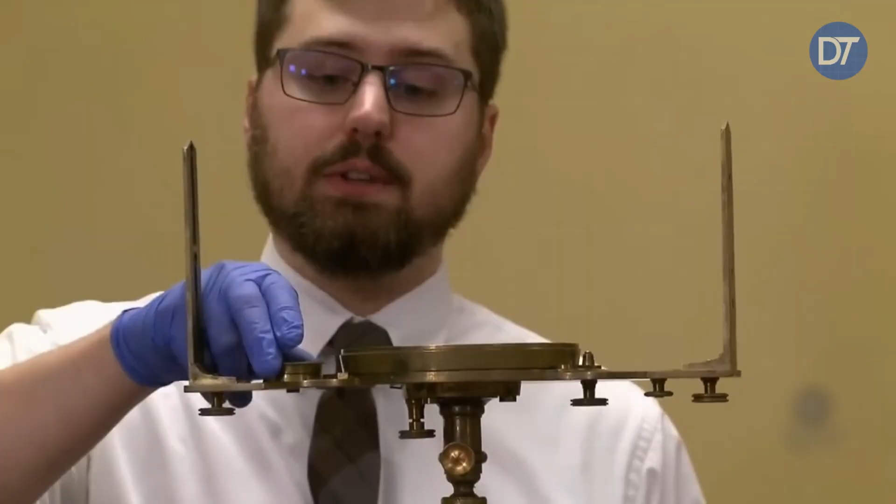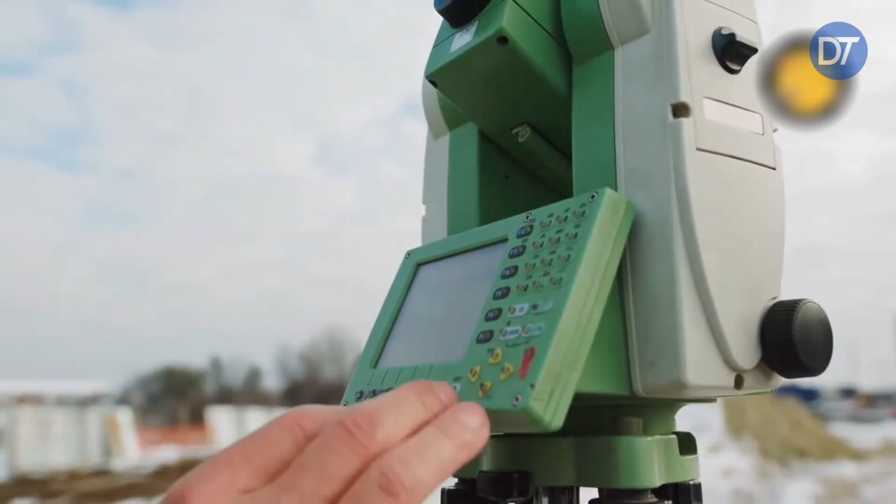There was no beam of light to send across the water and time on its return, and no signal from overhead to read a position off the sky, because neither had been invented and neither would for another 30 years. Between him and that far cliff ran a strait that no tape could cross, and somewhere out in that water, at a spot nobody had yet marked, a tower would have to stand.

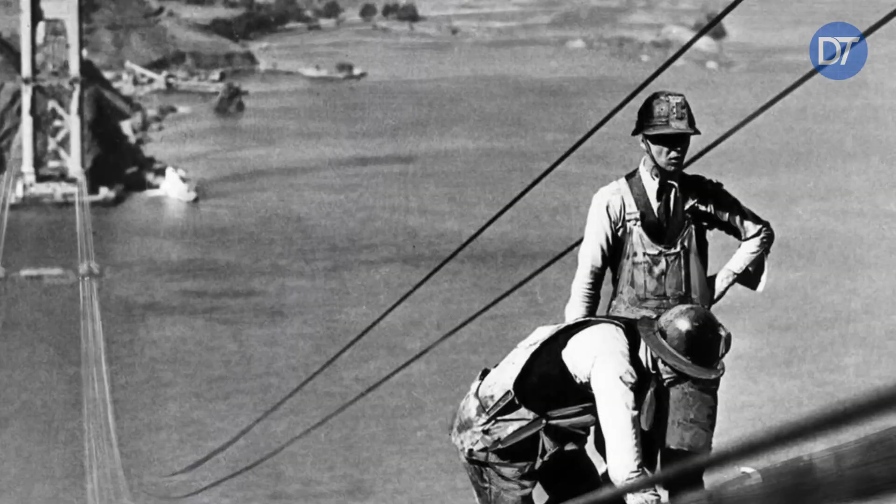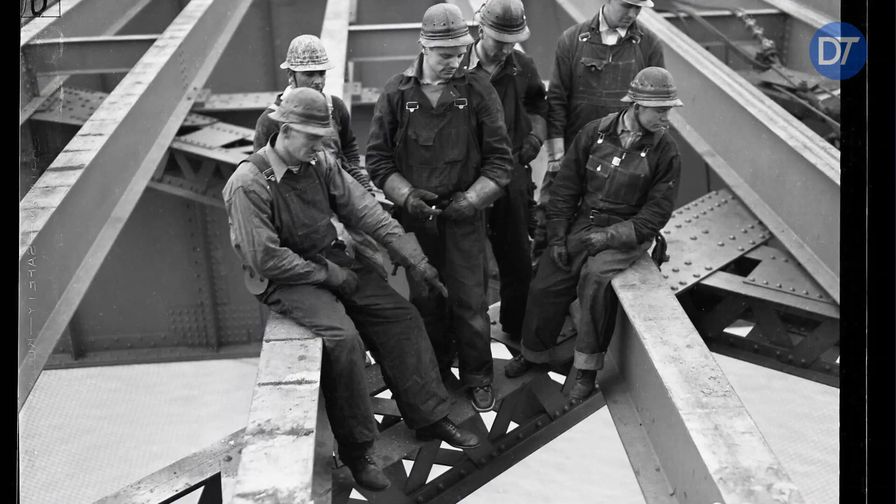What that man was fixing was the position of one of two towers that would carry a bridge across the Golden Gate, and the difficulty was that he had to be exact, while almost nothing about the site would hold still. He had to fix two tower positions nearly a mile apart, one of them more than 1,100 feet out

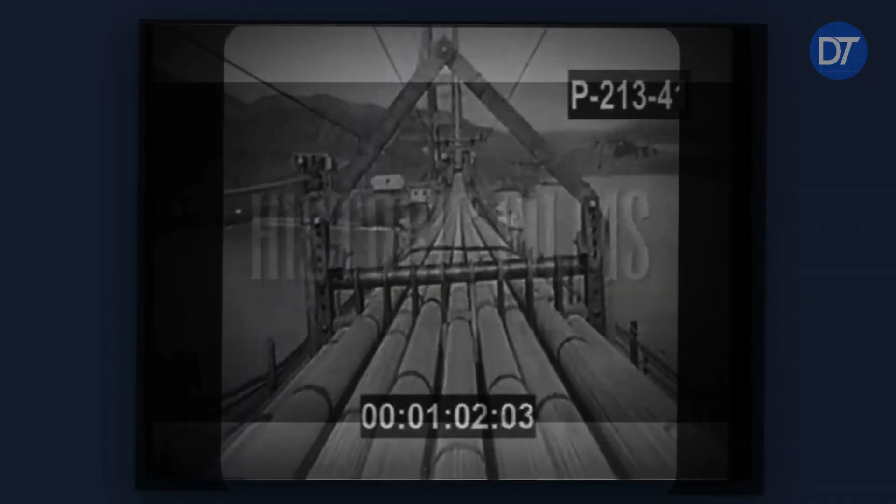in open water, while the current beneath it ran to several miles an hour, while the shipping channel stayed open to traffic, while fog closed his sightlines for days, and while the whole arrangement stayed exact enough that two towers built years apart would end up carrying cables that met, wire for wire, in the middle of the span.

The bridge is usually remembered as a triumph of steel and orange paint. It was first a triumph of measurement. The steel could not be ordered, the cables could not be spun, and the towers could not be placed until someone had reduced a mile of moving water to a set of numbers and been right.

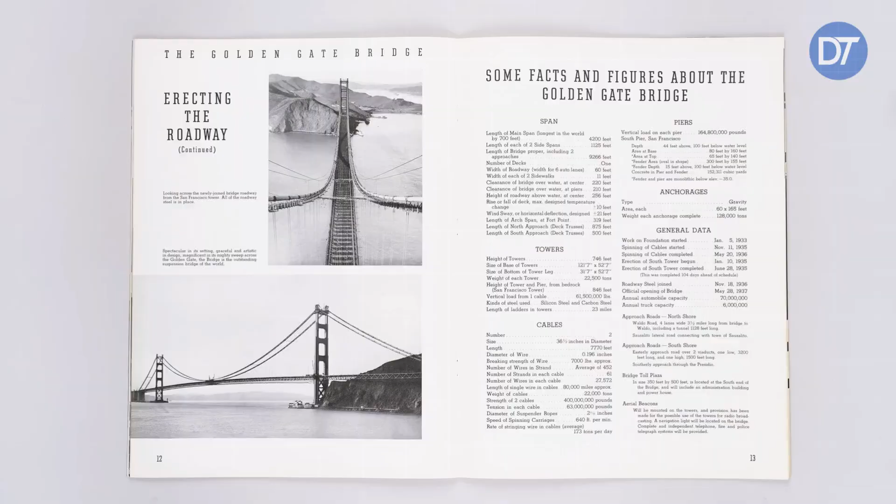This is the story of how a strait was measured with brass and steel tape. It is the story of the men who fixed two towers in the right place years before the cables that joined them existed. It is the story of one number, 4,200 feet, that had to be true before anything could test it. And the first obstacle was the oldest one in surveying. You cannot measure a distance you cannot cross.

The obvious answer was a steel tape or a chain laid straight across, the most trusted tool a surveyor owned, accurate on solid ground to a fraction of an inch. It was useless here. A tape stretched across a mile of tidal water would bow in the current, sag under its own weight, and never lie straight, and the channel beneath it could not be closed for the attempt.

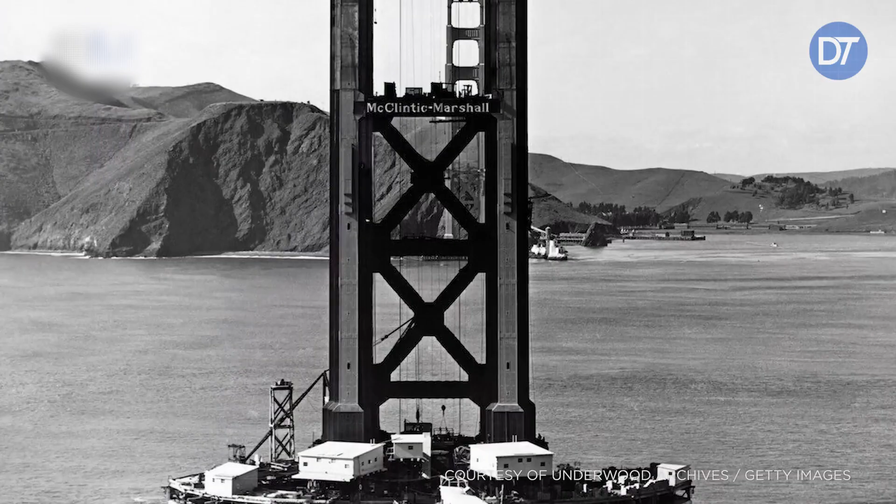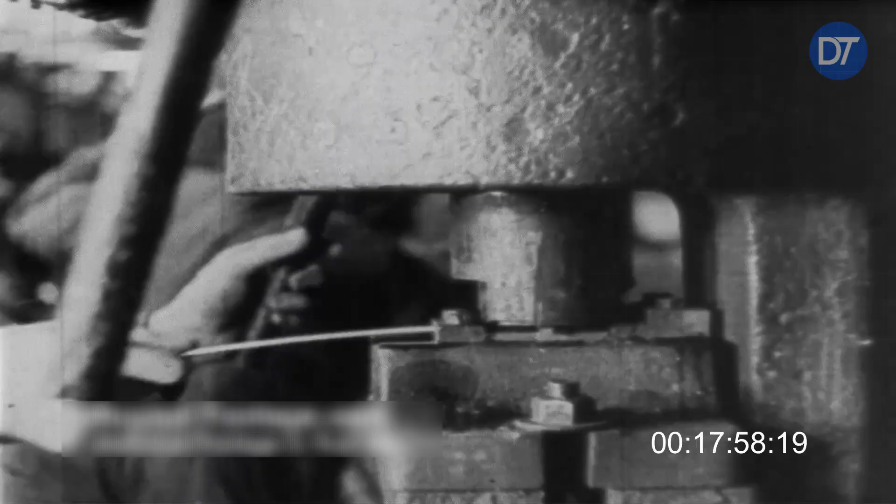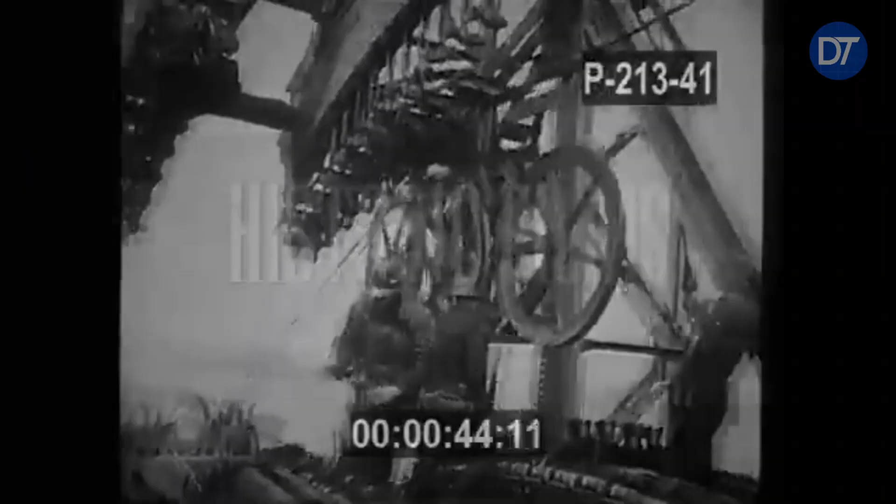The second answer was to take the tower positions off the nautical charts that already existed for the strait. Those charts were good. They were drawn to keep ships off the rocks, and for that they were precise to within yards. But a tower foundation had to be set to the foot, and its cable had to arrive at a partner tower a mile away and meet it exactly. So an error a passing ship would never feel would put the two halves of a bridge permanently out of line.

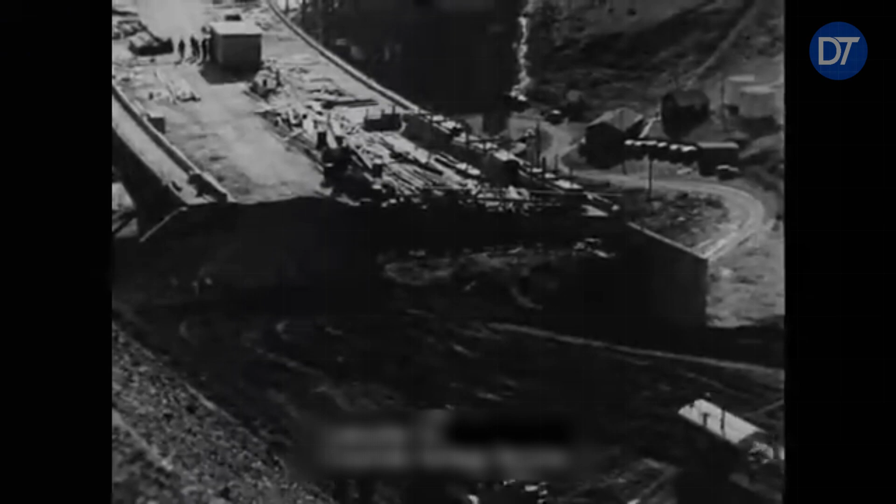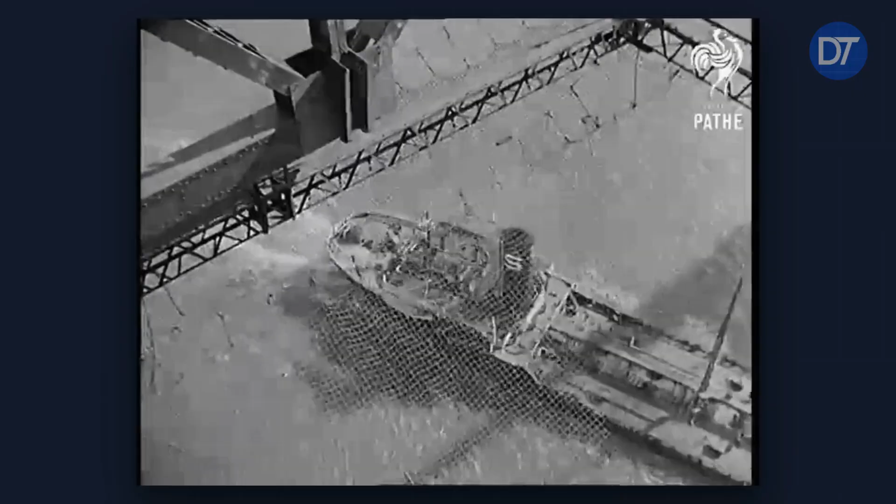The third answer was to measure from the water, from boats dropping marked buoys and ranging between them. At that time, it was hopeless. A boat has no fixed place to measure from, and the instant you read an angle, the boat has moved, and the buoy with it. Every direct approach failed for the same reason, that the water would not stay still and could not be crossed.

So the answer was to stop measuring the water at all, and instead measure a thing that would hold still, a straight line on solid ground, letting the far point be reached by sight rather than by foot. That method was triangulation. Triangulation begins with a baseline, a straight line of known length laid out on firm ground and measured with a tape you can hold flat, check, and check again as many times as it takes.

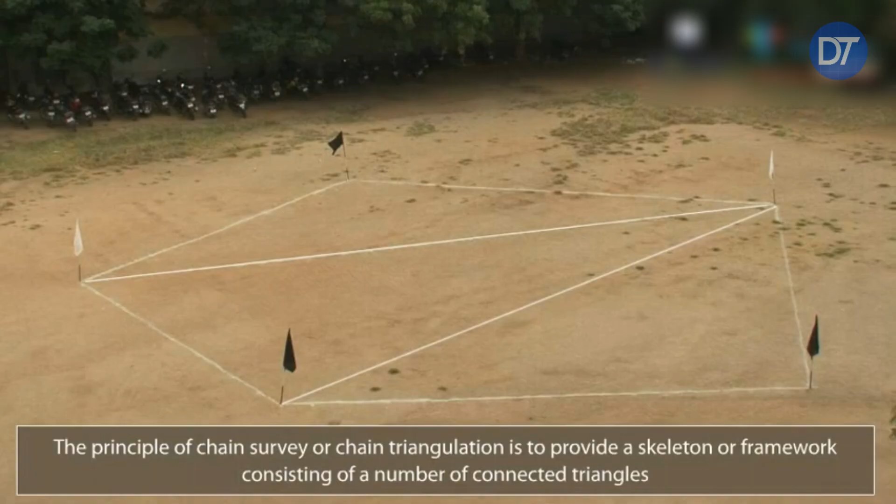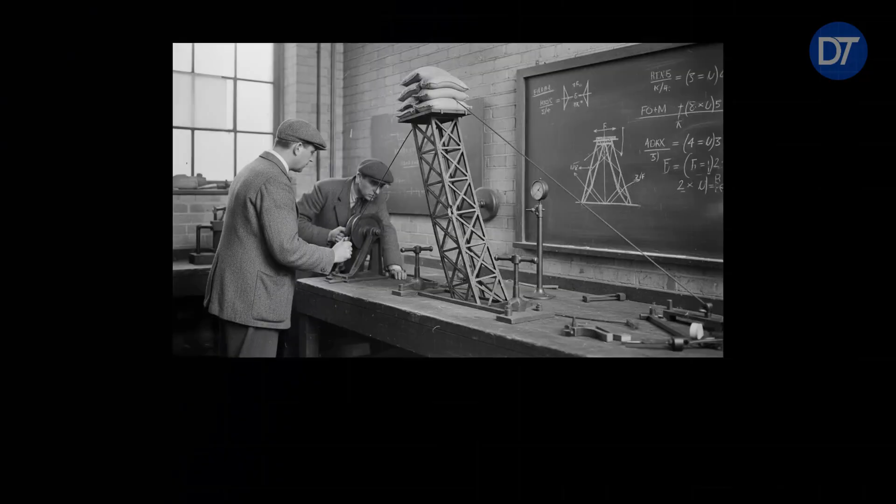You stand at one end and measure the angle to the distant target. You walk to the other end and measure the angle again. Two angles and the length of the line between them fix the triangle completely, and simple trigonometry then gives the distance to the point you never touched.

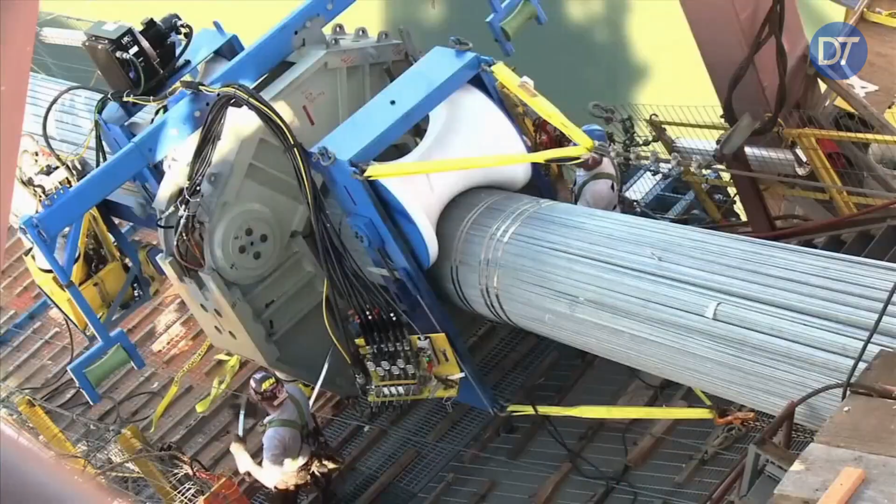It is the same method that fixes the distance to a ship at sea by sighting it from two towers a known distance apart without any boat leaving the shore. The inversion at the heart of it is the elegant part. The width of the strait, the very thing that made a tape useless, meant nothing to a method that measures angles instead of lengths. The far point stays unreachable, and you only ever look at it. What defeated every other approach was irrelevant to this one.

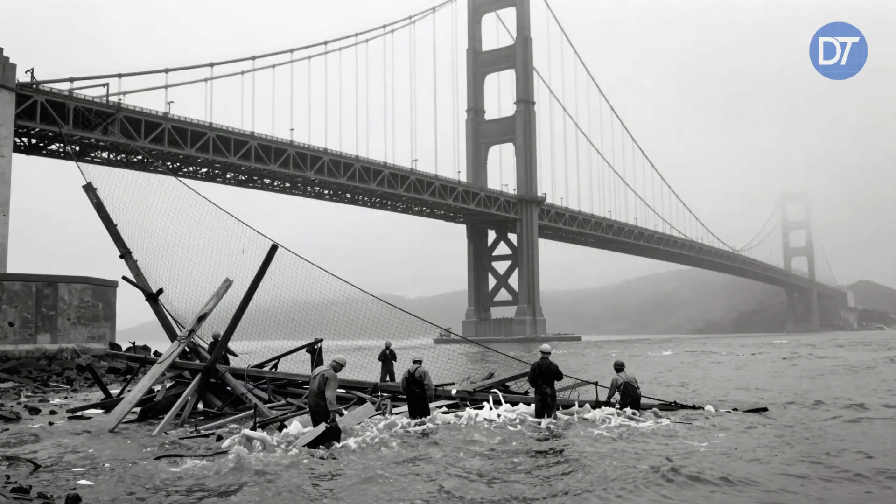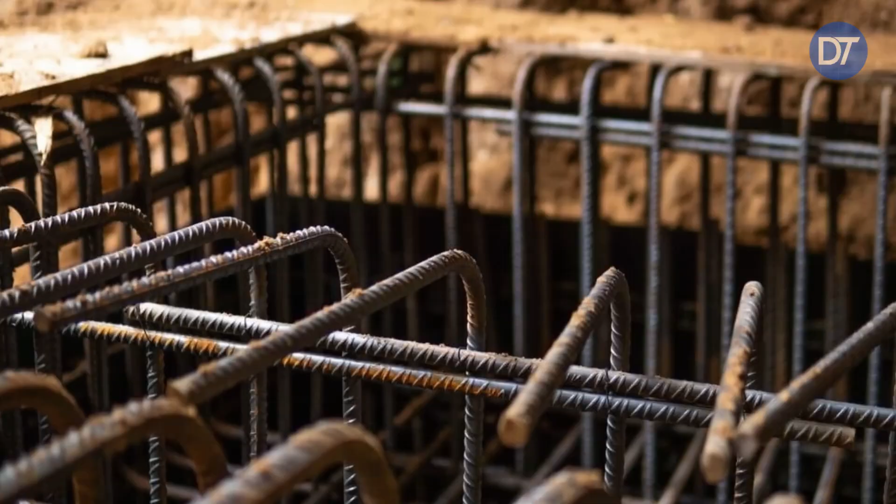The Bridge District understood this early and named a manager, Alan MacDonald, years before the first concrete was poured in 1933. The $35 million in bonds paid for a project that began not with steel, but with angles. It existed on paper first.

The main span between the towers was 4,200 feet. Each side span was 1,125 feet. Each tower would rise 746 feet above the water, and the deck would hang 220 feet above the tide. Every one of those numbers had to agree before a shovel moved.

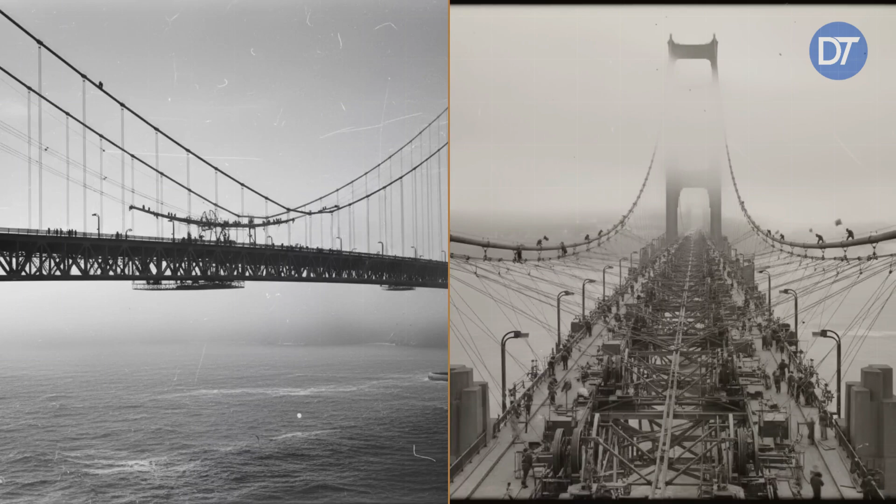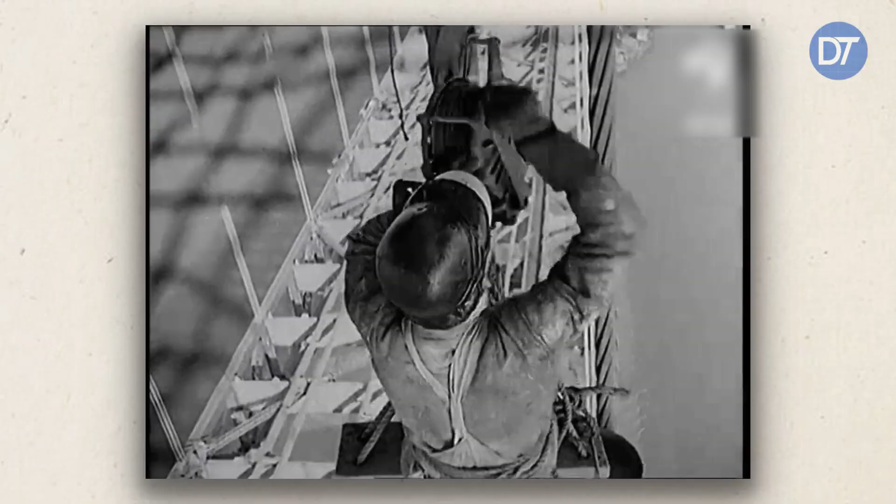What carries the bridge is not the towers, but the two main cables that ride over their tops, each 7,650 feet long, running from one anchorage to the other. Each anchorage is a block of concrete weighing 60,000 tons. The towers matter only because the cables rest on them. Set the tower tops wrong, and the cables ride wrong.

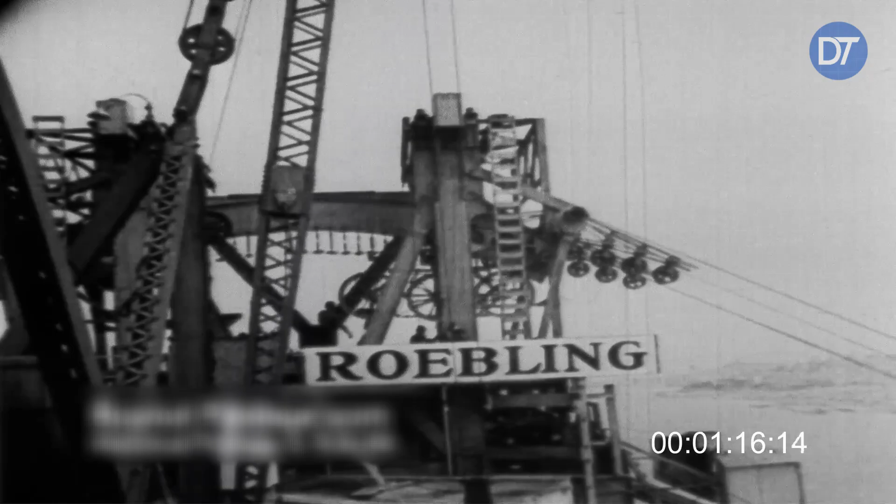Each cable is not one piece. The John A. Roebling's Sons Company, which had spun the Brooklyn Bridge cables 52 years earlier, built each one from single wires carried across the strait on a wheel that ran back and forth, one loop at a time. Later, 6 at once, the strands color-coded so no wire was lost.

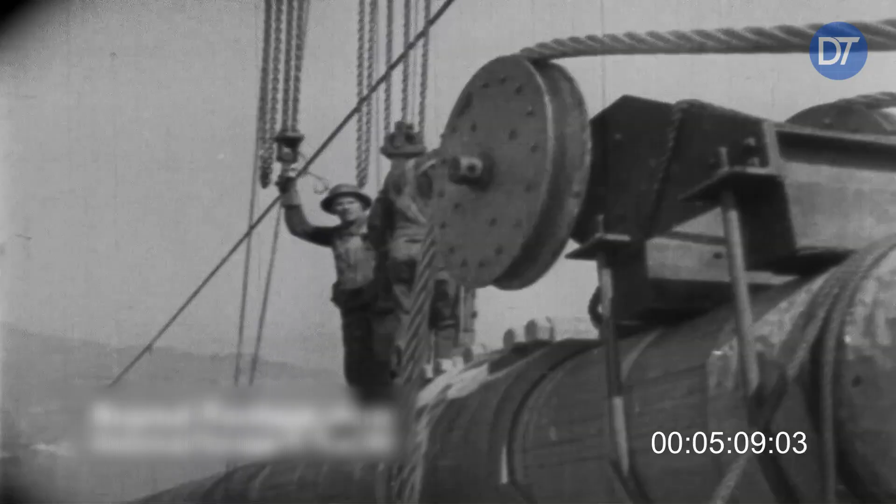A finished cable is 3 feet through, and it is made of 27,572 wires, each one less than 2/10 of an inch across, thinner than a pencil. Across both cables, there are 80,000 miles of wire. The work was scheduled for 14 months. Roebling finished the spinning in 6 months and 9 days.

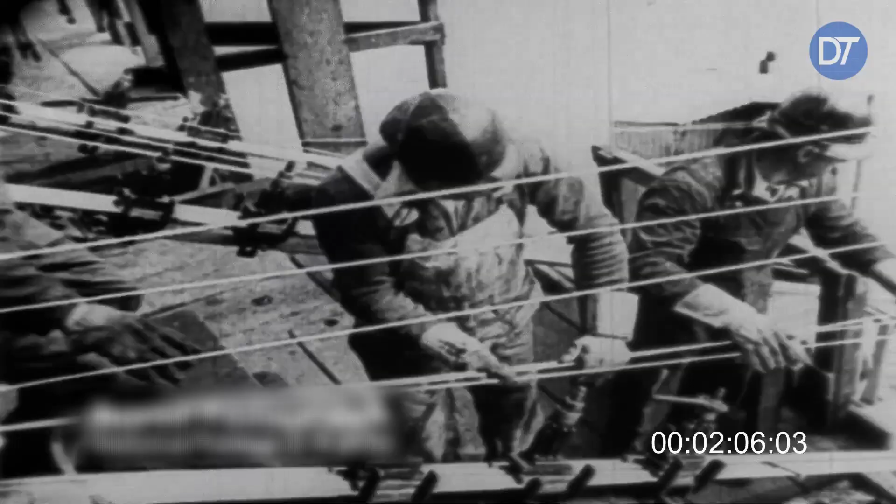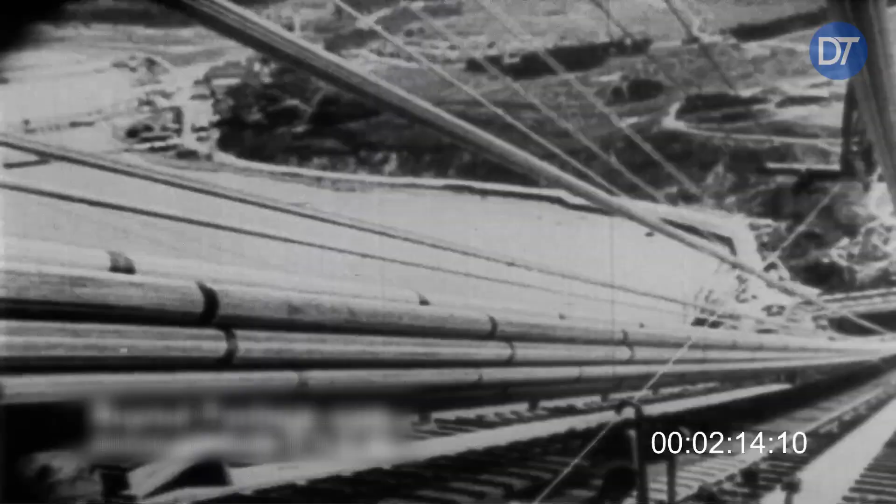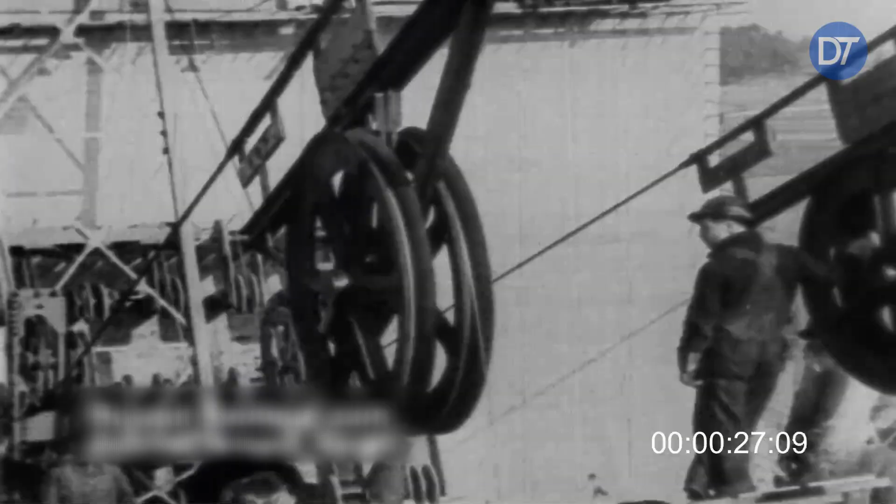The wire is galvanized carbon steel, drawn hard for strength, and every wire in a cable had to sit at exactly the same sag as its neighbors. That sag was set against a single reference wire, strung first and adjusted to the computed curve, and every wire afterward was brought to match it. Steel lengthens in heat, so a wire matched in the afternoon sun and one matched at dawn would not agree, and the men had to read the sag against the temperature of the steel at that moment.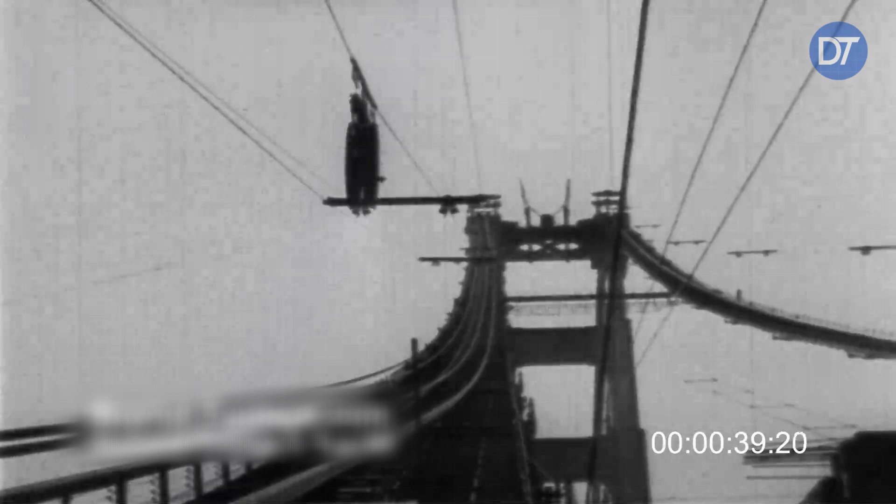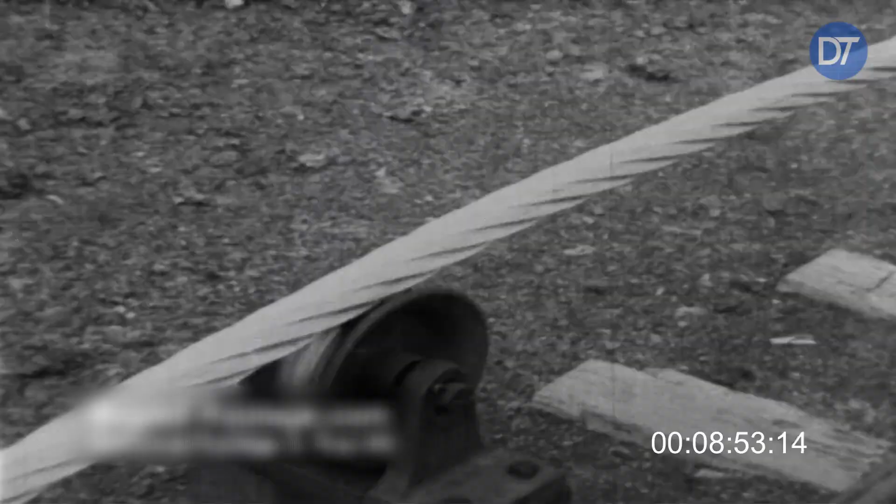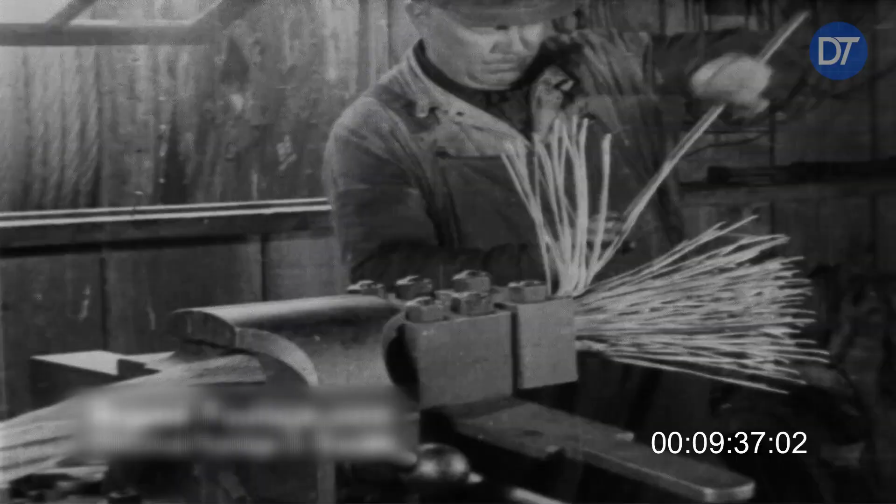There was no beam to fire down the line to check it. The curve was watched by eye against the reference wire and by transit sighted from the tops of the towers. If the reference wire was set wrong, every wire brought to match it would be wrong. If the wires were wrong, the cable would not share its load evenly. And if the load was not shared evenly, some wires would carry more than their share, and the safety margin the whole bridge stood on would quietly vanish. The entire structure came down, in the end, to a curve of steel judged against one first wire.

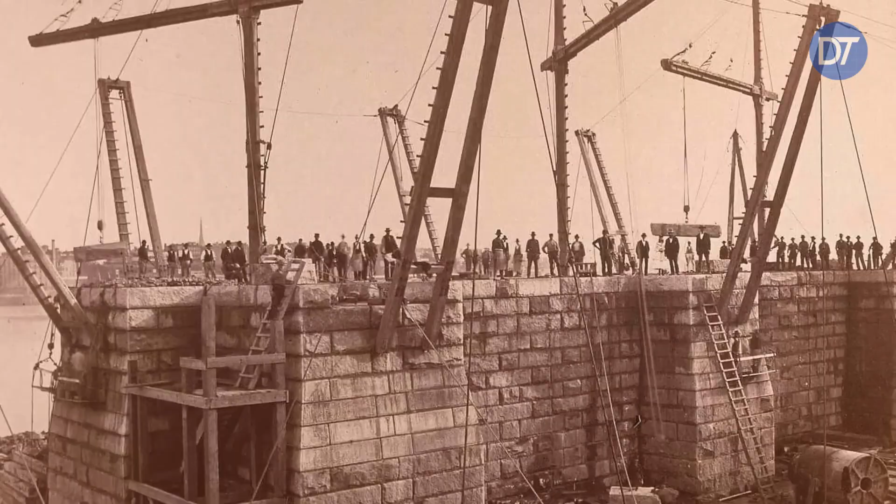What the arithmetic could not do was go down into the water. For that, men went instead. The bridge went up in the deepest years of the Great Depression, and the work drew men who needed it, thousands of them across every trade. The Pacific Bridge Company laid the foundations. The steel was raised by McClintic-Marshall, a Bethlehem Steel firm, whose iron workers stood the towers and rode the cables.

The hardest working day belonged to the divers at the South Pier, more than 1,100 feet from shore. They went down as far as 110 feet into water that was dark, cold, and moving, and they could work only at slack water, the 4 brief turns of the day when the tide changed and the current eased. In that window, they set dynamite charges, cleared broken rock down to bedrock with high-pressure hoses, and guided the concrete forms by feel, because at that depth in that water, there was almost nothing to see. The site punished them. Fog came off the ocean, and wind and cold for most of the year.

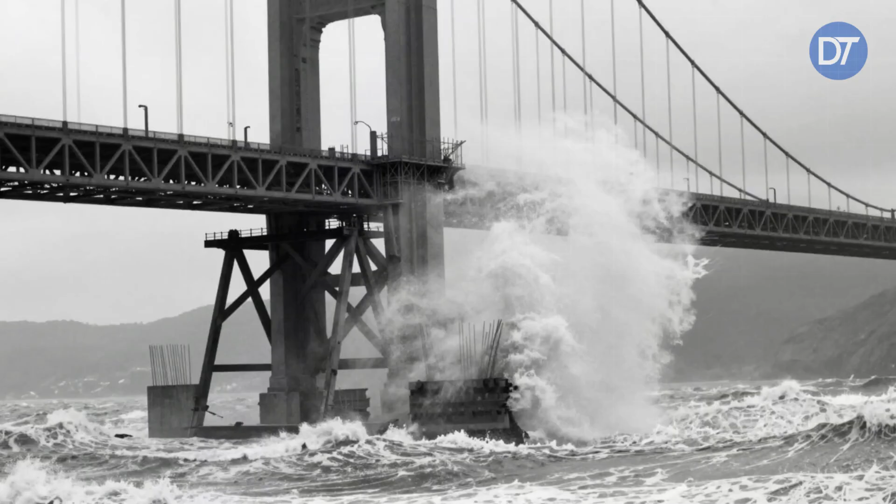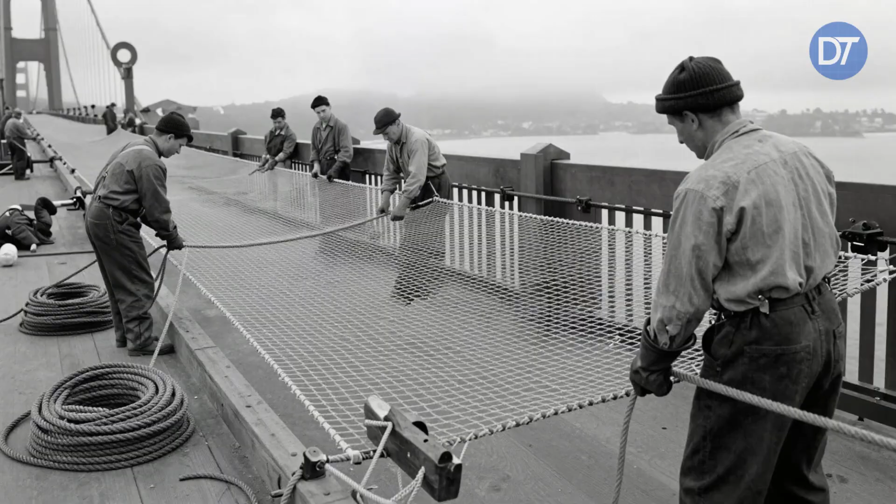The timber trestle out to the pier was struck by a freighter in 1933, and half of it was torn away by a storm soon after, and the men rebuilt it and went back out along it. The equipment they trusted with their lives included a safety net strung the length of the work, an idea Joseph Strauss insisted on, and hard hats, still new on a construction site.

For most of 4 years the net held, and it caught 19 men who fell and lived, men who called themselves the Halfway to Hell Club. Then, on February the 17th, 1937, a scaffold carrying 12 men tore loose and went through the net, and 10 of them died. In all, 11 men were killed building the bridge. The pay ran from $4 to $11 a day.

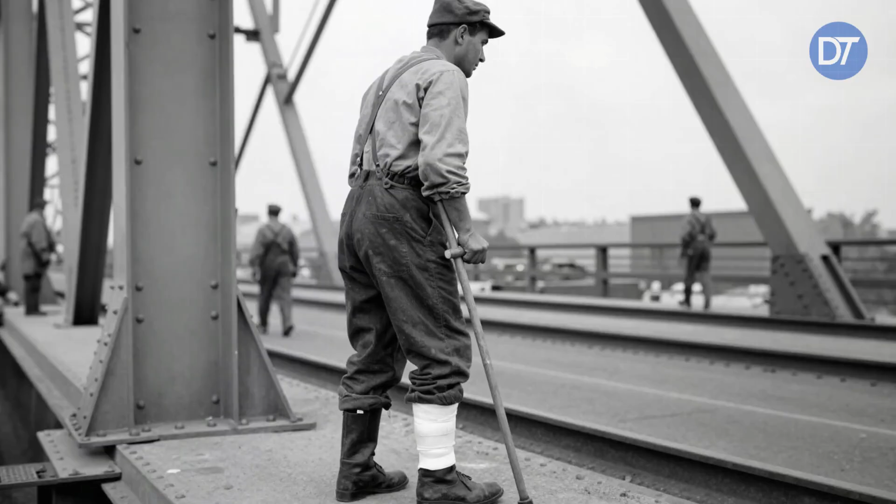The payroll records the trades and the counts, and it keeps some names and loses many more. The surveyors and rodmen who fixed the angles and most of the laborers who cleared the rock below the water appear in the record as numbers and job titles rather than as people. Whether the pay was fair is not a question the payroll can answer, because the payroll was kept by the men who set the pay.

Everything came to rest on a single test. The steel roadway was built outward from each tower toward the center, and the two arms had to meet in the middle. Every angle measured off that cold bluff years earlier now had to prove itself in the last few feet of open air over the strait. If the towers had been set even slightly wrong, if the 4,200 feet had been off, the two arms would arrive out of line, and no amount of steel could close a gap the arithmetic had already opened.

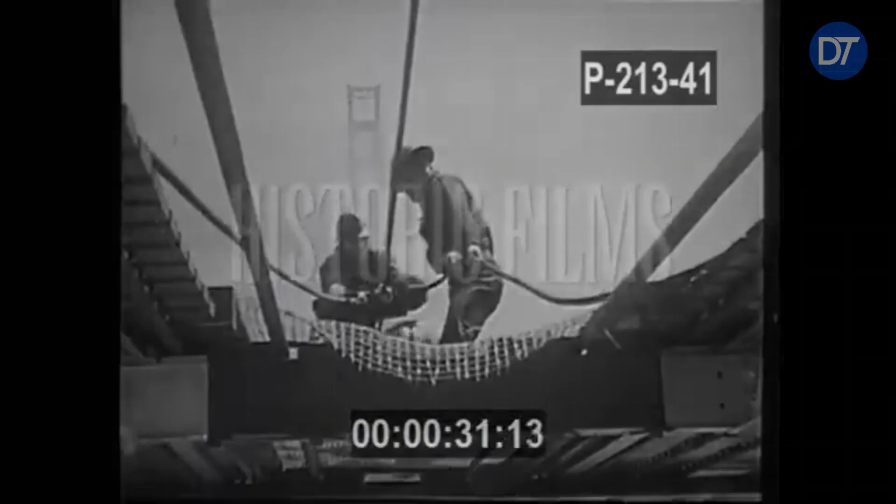The arms reach out. Each day the gap narrows. Overhead, the cables hold the curve they were computed to hold. The tolerance now is not in feet, it is in inches, and the arms meet. The number set years before, from angles measured across water nobody could cross, holds. On May the 27th, 1937, the bridge opened, and roughly 200,000 people walked across it on that first day. Joseph Strauss presided as chief engineer.

Charles Ellis, who had done the calculations that turned the strait into the numbers that held, was not there. Strauss had removed him from the work in 1931, and Ellis received no credit at the opening. The recognition reached him decades later, long after the number itself had already been proven true.

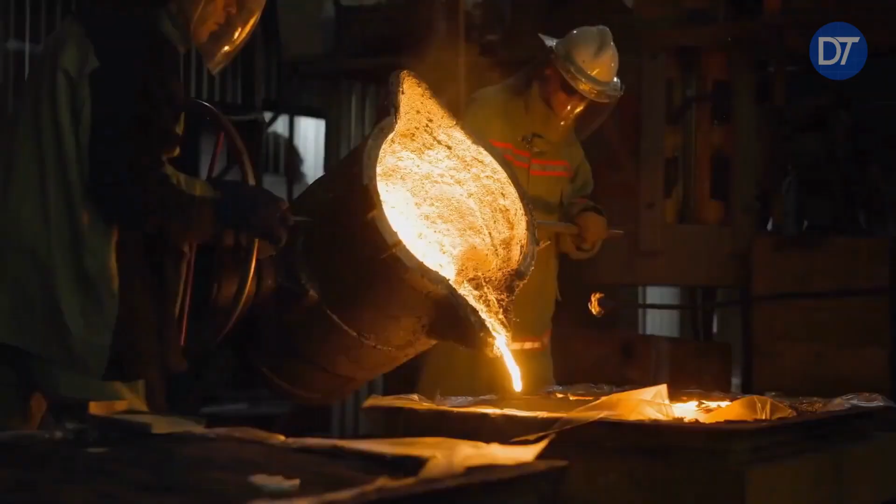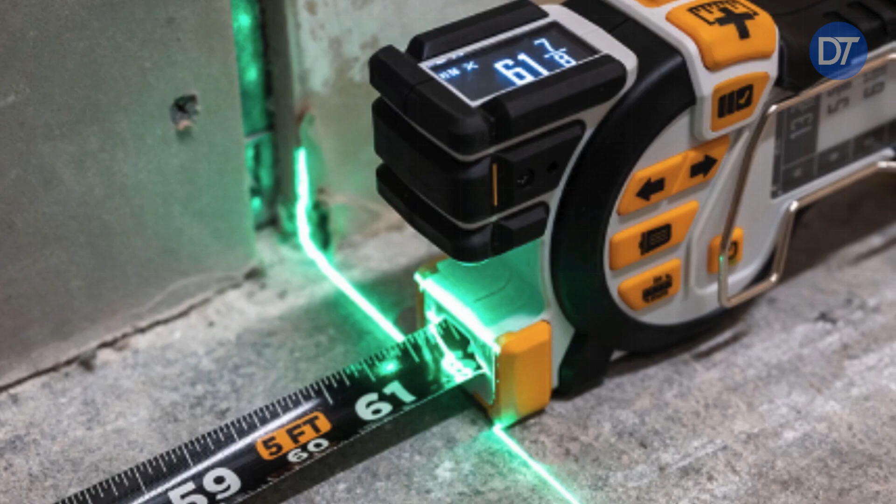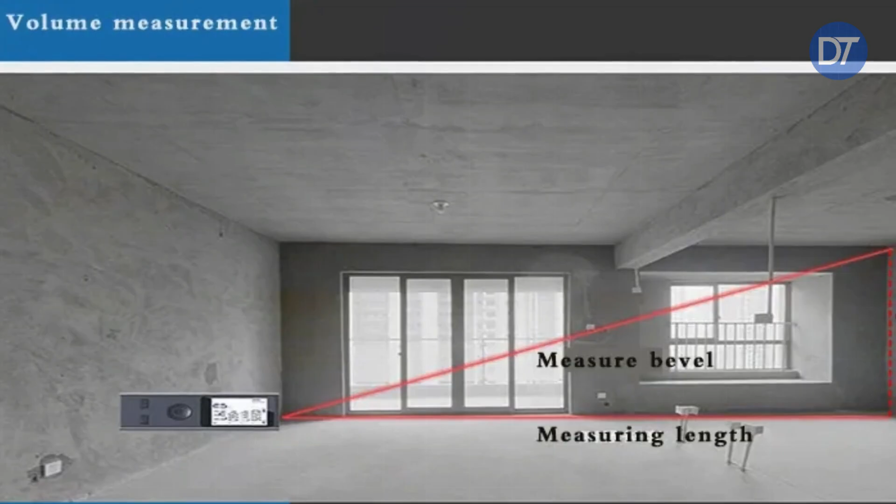Within a single lifetime, the brass transit, the steel tape, and the long hand arithmetic were replaced. The laser, first built in 1960, could send a beam across the water that no tape could cross. Satellite positioning, decades later, could fix in seconds a point that had once taken days of angles and computation. The successor did in a moment what a crew had done in a season. What did not change was the idea underneath it.

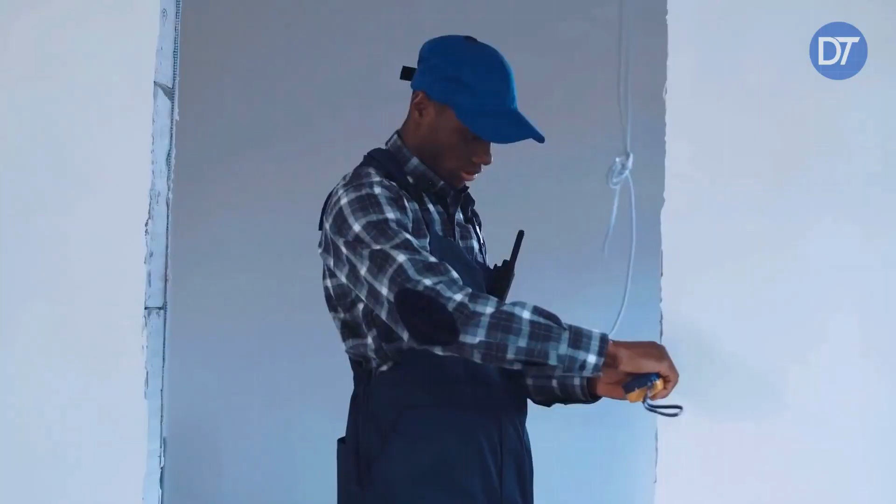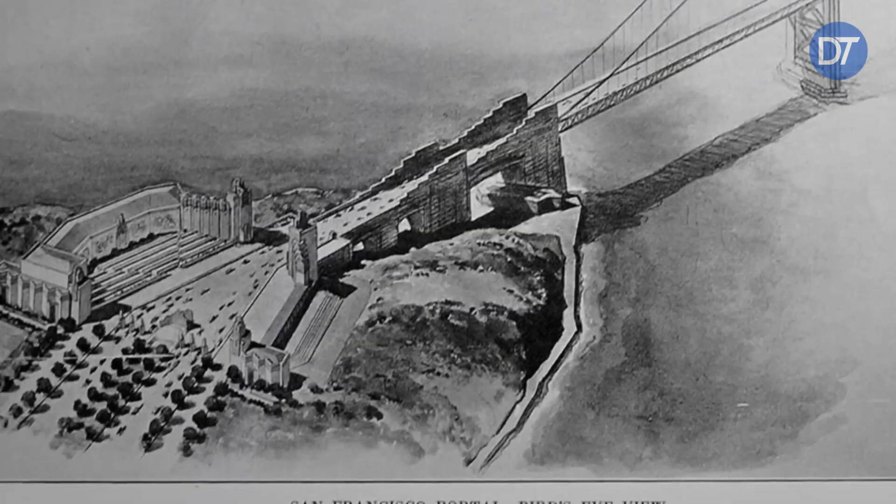Before any large structure goes up today, a control network is still laid, a baseline still fixed, positions still computed outward from it. The satellite replaced the labor of triangulation, not its logic. The men on the bluff were doing by hand exactly what the machine now does without anyone watching.

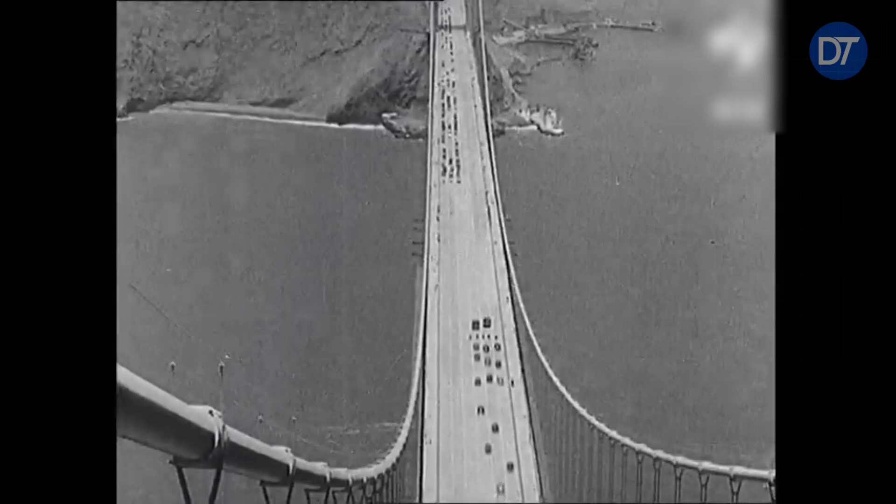Stand today at the rail at the center of the span. You are 220 feet above the water, and the deck moves very slightly under your feet by design. Above your head, the cable runs 3 feet through, and packed inside it are those 27,000 wires, every one brought to match a single reference wire strung before you were born. The spot where you are standing is exactly where it is, because a man on the far shore measured an angle to it and trusted the number it gave.

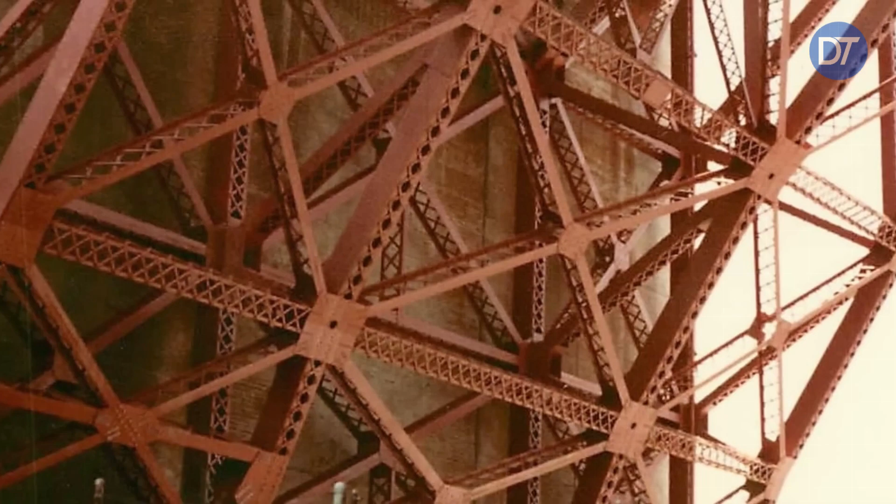When people picture San Francisco, or the engineering of that age, this is the shape they picture. The reason is not the color and not the postcard. The reason is that the thing was computed right the first time and has held ever since, through wind and fog and earthquake, exactly where it was said it would stand.

The men who sighted the angles and stretched the tape and went down into the cold water are mostly unrecorded, and the work they measured into place still deserves the recognition nearly 90 years on. Not a leap of faith, not a lucky alignment, a mile of moving water reduced to a number, and the number was right.